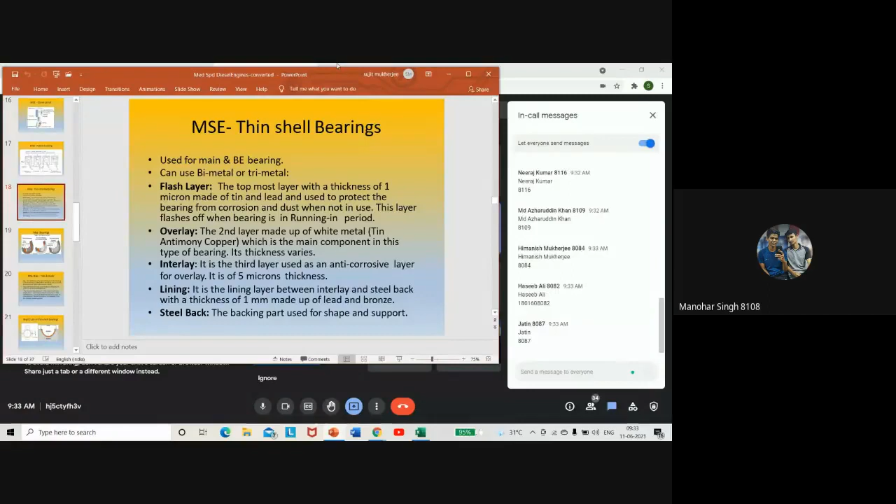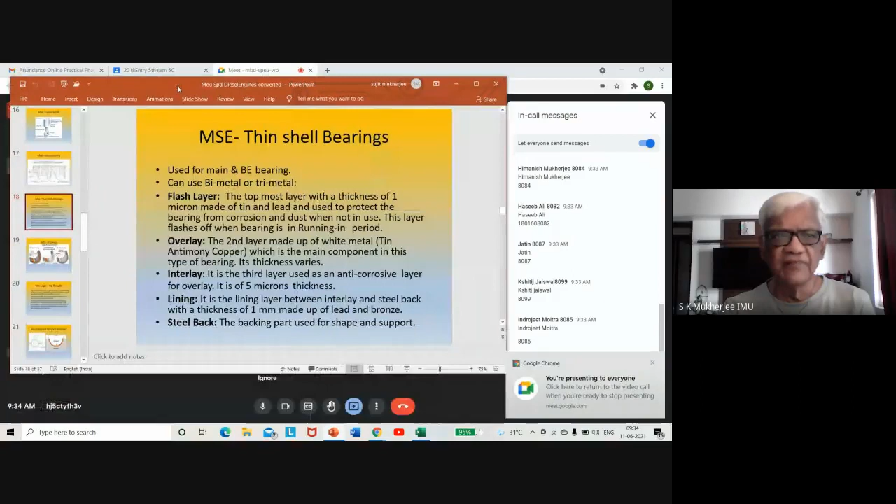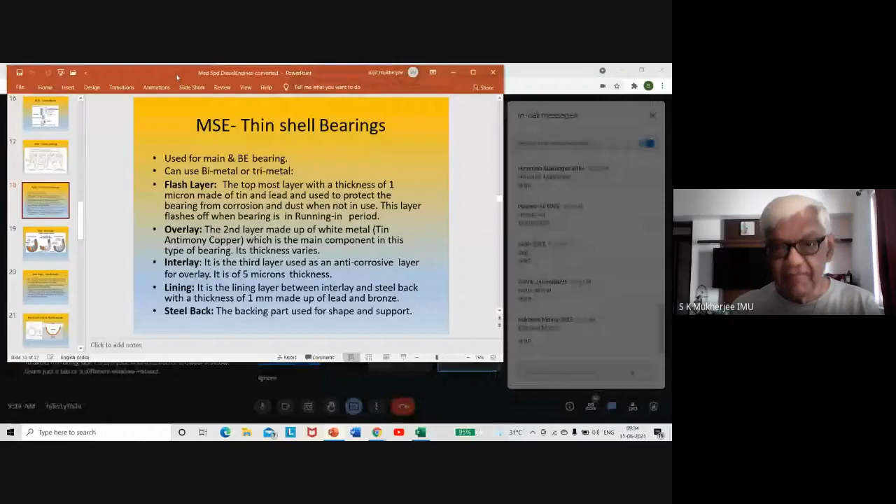All right, let's start with our thin shell bearings. Now, there is a lot of write-up about thin shell bearings, but the basic concept you must be able to absorb before you read the technical fine points. A thin shell bearing is a bearing which can be replaced very easily. I will not go into the details of the older type of bearings used in earlier ships, where molten metal was cast in and then machined, and then it had to be... what was that term? Bedding. Bedding of the bearings was required to be done. Bedding was one of the most difficult tasks engineers used to suffer on the ship, and it used to take almost a whole day for one bearing.

So now all those troublesome jobs have been eliminated and we have what are called thin shell bearings. Now, a thin shell bearing is like a part. If it wears down, you simply change it. If it gets damaged, you simply change it. It's not so costly as the original cast-in bearings. The cast-in bearings were a headache, and if they were damaged, the ship would have been immobilized. It was like that. But now with thin shell bearings, it consists of a strip of plate in the form of a curvature.

And that plate is made of steel. It is made of a little high-grade steel where there is some amount of springiness. All right. And on the inside layer, you have a white metal. White metal is made of either tin, copper, lead, antimony, and a few more elements. But the basic four are tin, copper, lead, antimony. Remember? So with that, you may have a little other rare metals also, but mostly these four metals are there. And here again, they are subdivided into tin and lead-based white metals. Some of the white metals are tin-based, some of them are lead-based.

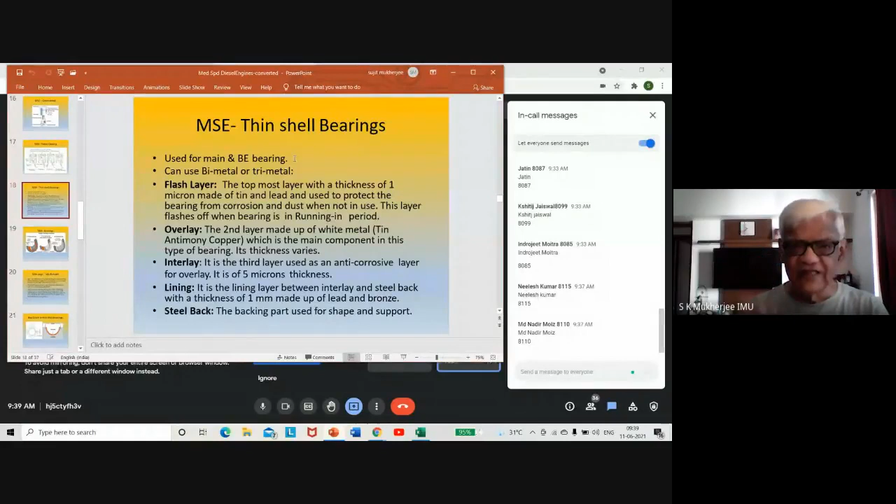So let's read up on what white metals are about. It has a little more detail than you really need, so we'll read it and then see the diagrams. It is used mainly for main engine, main bearing and bottom end bearing in 4-stroke engines. In 2-stroke engines, you will use it for crosshead bearing, bottom end bearing, and main bearing. All three use thin shell bearings. But in a 4-stroke engine, only the bottom end bearing and main bearing use thin shell bearing. The gudgeon pin bearing is a bronze bush, given a little softness by introducing some lead into the bronze. Bronze is basically made of tin and copper, which together form a very hard combination. To give it softness and a smoother surface, a little lead is added into that bronze mixture, so it's called a lead bronze bush.

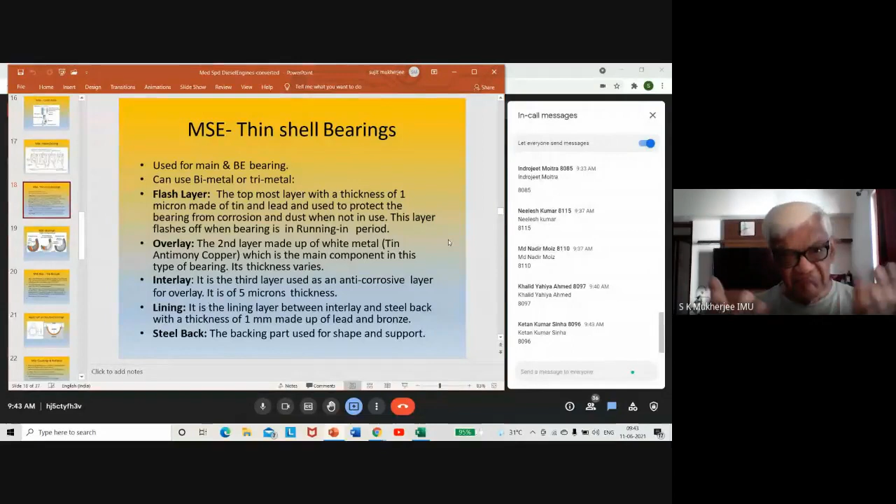I don't understand why he says dust, because when you are going to use it, you will wipe off the dust, put oil on the surface, and then fit it in place. So dust really doesn't make much difference, unless he means the dust gets embedded in the white metal. That is possible because white metal is reasonably soft.

To prevent the dust from being embedded into the white metal, you have a coating of tin and lead. Within maybe 2 or 3 revolutions of the shaft on that bearing, that flash layer is gone.

Under the flash layer, you have an overlay. This is the second layer, made up of white metal. The white metal is the main surface which takes the support of the bearing, and it is tin, antimony, and copper, or lead, antimony, and copper. That is the combination of white metal. It is also called Babbitt metal.

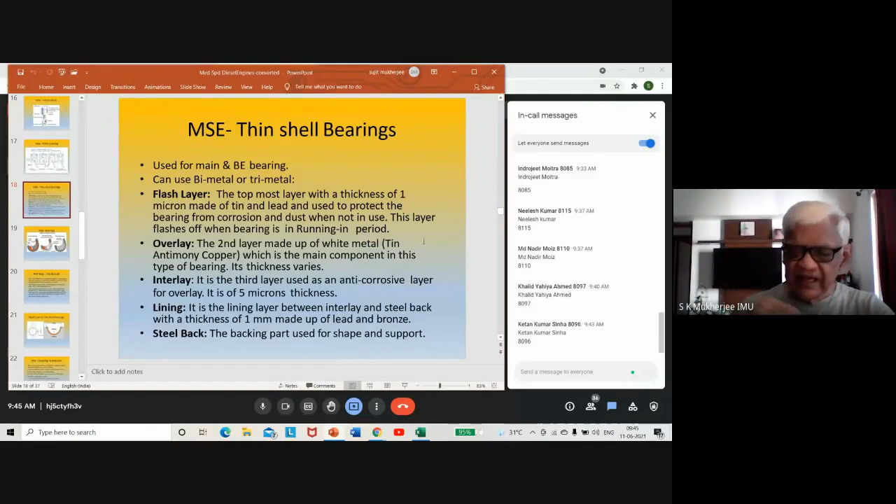You can write it down on a piece of paper: Babbitt metal. It is possibly named after the engineer Babbitt, who designed the first white metal for use in bearings. It has been found to be very good, and is the main component in this type of bearing. Its thickness varies, and this variation is determined by the designer.

He will check how much load it is supposed to give, what will be the temperature of the oil, what will be the viscosity of the oil, and what will be the speed of the shaft. All these parameters are taken into consideration when determining the hardness of the white metal to be used for that bearing. So there is a lot of calculation, mathematics involved in designing a bearing.

It is not only manufacturing white metal and steel and putting them together. There are thousands of permutation combinations of white metal constituents, and the designer can order a special grade of white metal for the bearings he intends to use for the engines.

So that is called the overlay. The interlay is the third layer, used as an anti-corrosive layer for the overlay. It is 5 microns thick. This one also doesn't give so much effectiveness, because 5 microns is almost like a layer of paint.

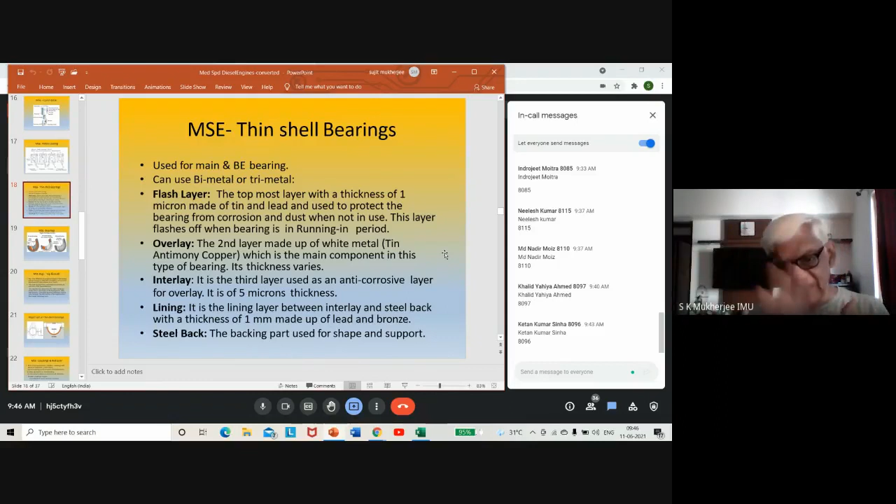It is used as an anti-corrosive layer for the overlay. So first you have the white metal, and underneath that surface you have the interlay. Then you have what is called the lining.

This is the one that holds and gives the bond — it is the bonding device. It is the lining layer between the interlay and steel back, with a thickness of 1 millimeter, made up of lead and bronze, or sometimes copper.

Mostly what I have seen is copper — lead bronze, yes, but mainly copper. Because I have seen white metal getting wiped out and then a layer of copper appears, not totally copper color but a little lighter, which could mean it is lead bronze, because ultimately bronze is also copper. Bronze is copper and tin.

So bronze is copper, tin, and lead. This is the same material that is used in the bush for the gudgeon pin.

Underneath this lining, you have the steel back. This is not mild steel, it is an alloy steel. It is definitely a lot tougher than mild steel.

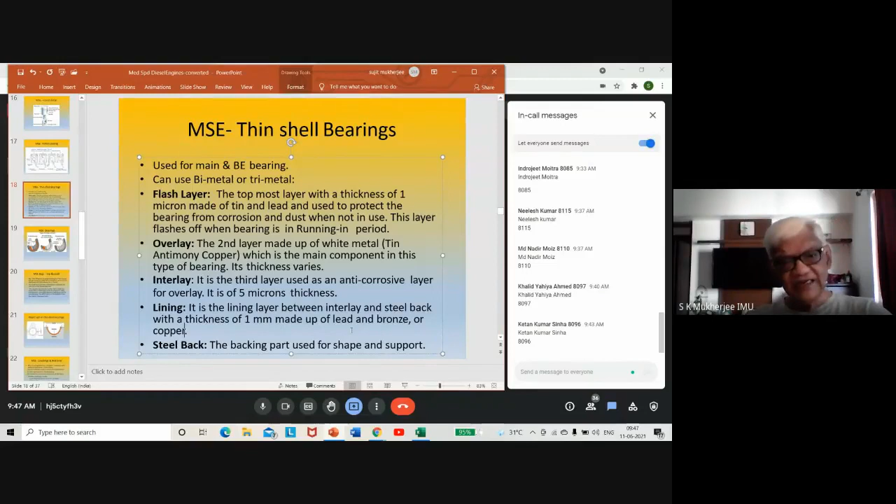Now this is the diagram to show you, it's an expanded diagram. It is not in these proportions what you see, it is definitely much thinner.

But these diagrams are made to give you some idea of what is a thin shell bearing. On the extreme right side, what you see is a steel back, and underneath that you have an aluminium bonding layer. So instead of copper, here they are using aluminium. On top of this, they are using an aluminium bearing alloy, a mixture of some other elements not specified, but the main constituent is aluminium. Aluminium is also a soft metal, and it could possibly be used, but on board the ship we have not used such bearings with aluminium as the surface.

We have mainly used white metal, but keep your mind open that white metal is not the be all and end all as the material used for a bearing surface. So here he can use an aluminium bearing alloy. In some cases you have lead bronze also. But on board ships, most of the bearings, I would say 90%, are white metal bearings, white metal lined bearings. So this is your thin shell bearing where it has an overlay.

Under the overlay, you have the nickel barrier, which is supposed to be anti-corrosive, prevents corrosion. Underneath that you have the copper alloy. This nickel layer is 5 microns, it is as good as nothing. And then you have the copper alloy which is binding the white metal to the steel back. So that is how the thin shell bearing is utilized.

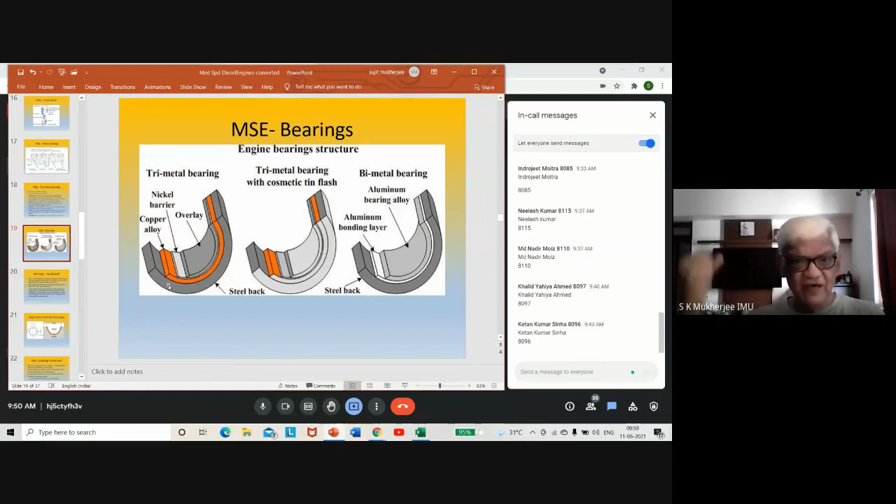Next, nip. Nip and crush mean the same thing. It is actually the extended part of the bearing shell which helps in compressing it and ensuring that the bearing shell sits very tightly on the keep of the connecting rod and the bottom keep. So when they are fitted together, initially the diameter of the shells together, outside diameter, is a little more than the inside diameter of the connecting rod and the keep when they are assembled together.

How much more? Maybe a few hundredths of a millimeter. So when you fit the bearings in place, that is a little protrusion of the bearing shells. But when the keeps are put together and the bottom end bearing bolts are tightened hard, this extended part of the shell is crushed or compressed within the elastic limits without causing any deformation. This helps in creating a force on the curved surface of the shell to improve the frictional resistance of motion between the shell and the entire crosshead bottom end bearing housing.

So when it is working, the shell will not rotate inside. The whole idea is to prevent any rotation or looseness of the bearing shells when it is working. If you do not understand, please put it up on the chat column, I will immediately address your doubts.

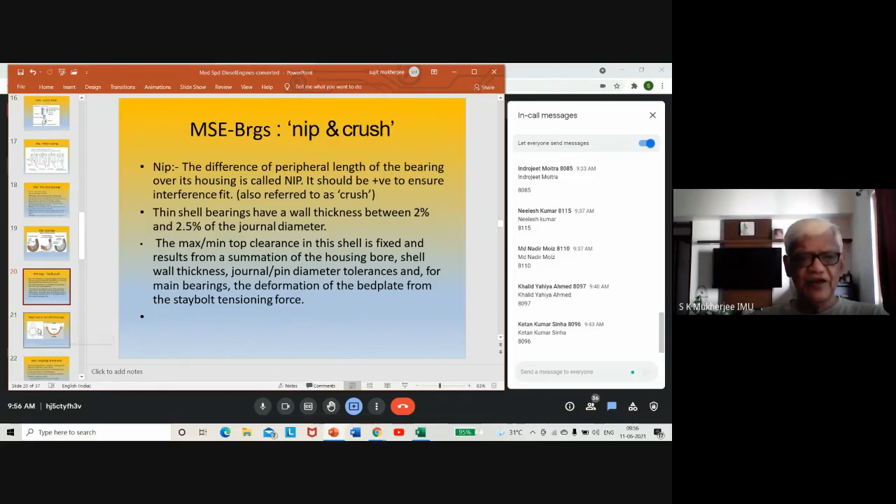Now here is your diagram which shows you how a thin shell bearing is installed. The lower half is installed in this position and it protrudes a little bit more than the hemisphere of the housing. The hemisphere of the housing is this lower piece, and the upper piece is part of the connecting rod. So when the two of them are put together with the bearing in place, there will be a gap between the faces of the bottom keep and the connecting rod.

This gap is called the crush height, and it is the height which is brought down from whatever it is to zero, because that is the time when the two bottom end bearing bolts are tightened to the required torque. So in tightening the bolts, this gap will vanish. It will disappear - in other words, the material which is protruding here.

This will be compressed. This compression force ultimately results in a force along the curvature of the bearing shell at the bottom, as well as the curvature on the bearing shell at the top. The top half is not shown here, but it exists as you've seen in this diagram. So when these bolts are tightened, the maximum force is exerted in the radial direction to increase the pressure of the shell against the keep. This prevents the shell from rotating inside when the engine is working.

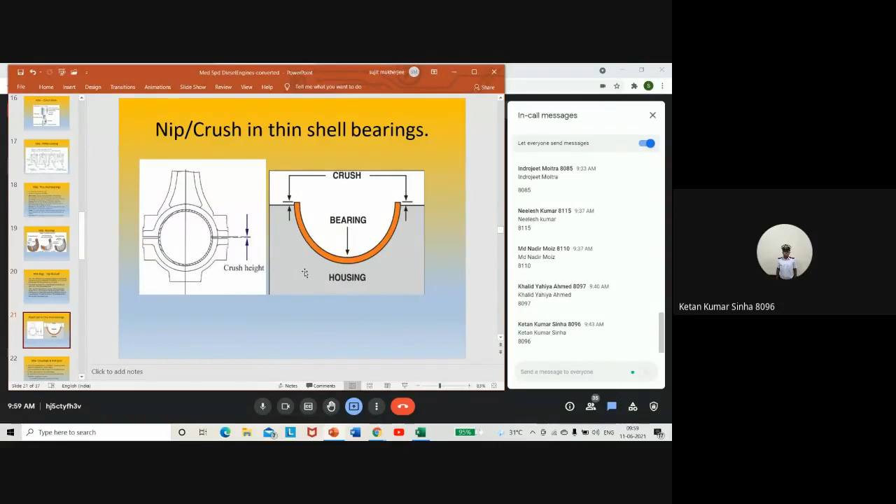For lubrication of the bottom end bearing - the gudgeon pin. The oil hole in the shell must match the oil hole in the connecting rod, and only then can the oil go to the gudgeon pin. If the two shells rotate, the oil hole of the shell will change its position and the oil hole to the gudgeon pin gets blocked. So your gudgeon pin, piston, everything will fail. It is very important to ensure that when the shells are fitted, they are fitted in the correct position and tightened to the required torque, so that the oil hole in the shell matches the oil hole in the connecting rod.

Ketan, now you kept me awake also. Otherwise it's not easy to constantly talk and stay awake because I can't see you. I can only see my laptop screen, which is very difficult. So I'm waiting to get back to our original procedure of classes.

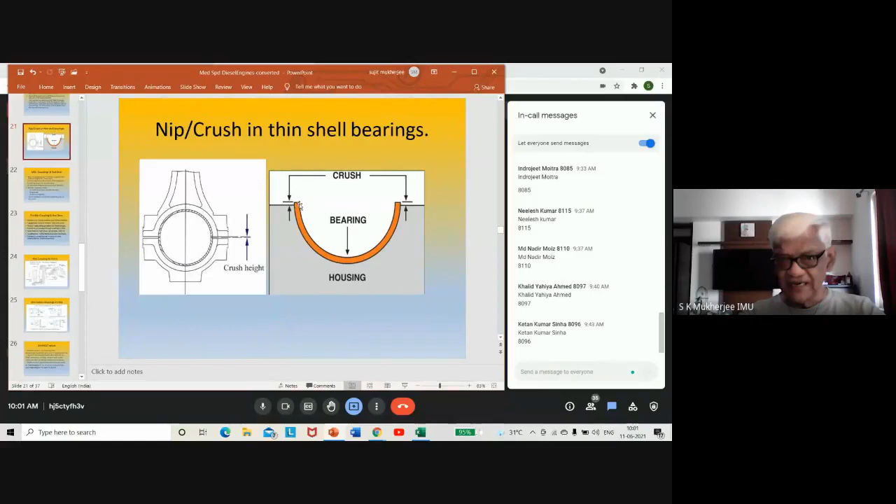Okay, so I hope everybody has understood the arrangement of a thin shell bearing, and what is crush and what is nip - it should be very clear to you. Next, for medium speed engines, now that thin shell bearings are finished, let us go to couplings and reduction gears.

Medium speed engines, because their speeds are much higher than the propeller, will need a reduction gearing. This reduction gearing is also coupled with a flexible coupling. This flexible coupling helps to accommodate small amounts of misalignment, it takes up some amount of shock loading, and it eliminates or reduces transmission of vibration.

Most of you will have seen a flexible coupling. In fact, in the engine room, every item has got a flexible coupling - whether it is a small pump, a piston cooling pump, or a compressor, everything has got one. This flexible coupling is very simple in most cases. It just has a rubber pad between the driving shaft and the driven shaft. So what is being turned is actually pushing onto the rubber pieces, and those rubber pieces are ultimately pushing onto the driven shaft.

So if there is a sudden torque, that torque will impact on the rubber, which is compressible. So it takes up any shock loading or sudden compressive forces, and does not transmit that force to the driven member. Similarly, if there is any misalignment within small limits, the bearings supporting the shaft will not be under undue loading, so the bearings will still remain fine. If the shafts are rigidly coupled and there is misalignment between one shaft and another, the bearings will be getting damaged very quickly, because the shafts will be bent, and as they rotate they keep bending in opposite directions, and the bearings get worn out or damaged.

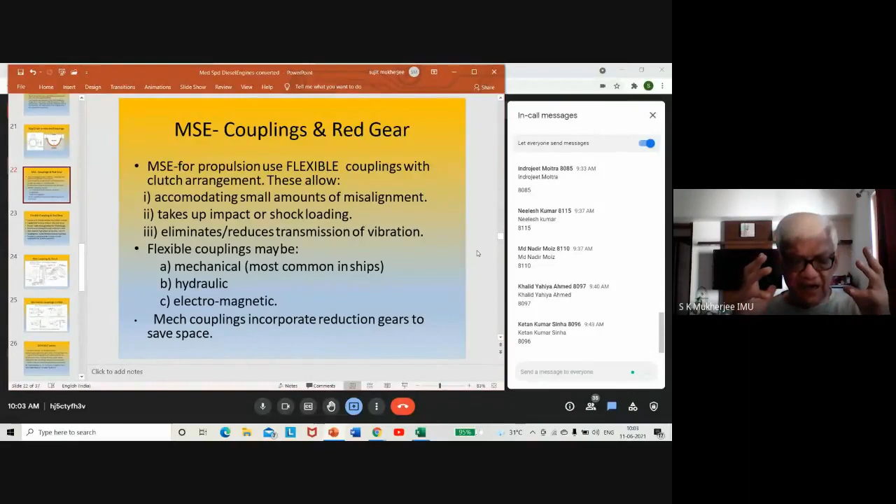But with a flexible coupling, it can take some amount of misalignment, some amount of shock loading, and if the driving shaft is vibrating, that vibration will not be transmitted to the driven shaft. So this is what a flexible coupling means, and this is used on almost every drive in the engine room.

You will see the flange of the motor and the flange of the pump, and in between they have a rubber pad. You have probably seen it at home if you have a pump in the basement with an electric motor and a pump. The coupling flange there is hollow, and inside that hollow space is a rubber disc. That rubber disc has got 4 holes - 2 holes are for the motor pins and 2 holes are for the pump pins. The disc in turn transmits the forces from the electric motor to the rubber pad, and the rubber pad transmits the forces to the pins of the pump.

So that itself has some amount of shock absorption. Apart from shock absorption, if the 2 pins are slightly misaligned, it doesn't make any difference - the rubber will take the shape and accordingly transmit the torque. Similarly, if there is any vibration of one shaft, the vibration to the other shaft will not be fully transmitted - actually it will be transmitted, but it will be damped out considerably. Total removal of vibration will not be there, but definitely it will be reduced to a large extent.

In mechanical couplings, some transmission of vibration is there, but in hydraulic and electromagnetic couplings, it is damped out completely. So now you know what a flexible coupling is - it accommodates vibration, takes up shock loading, and can take up some amount of misalignment. Flexible couplings may be mechanical, hydraulic, or electromagnetic. The most common are mechanical devices, which we will discuss now. Mechanical couplings incorporate reduction gears to save space.

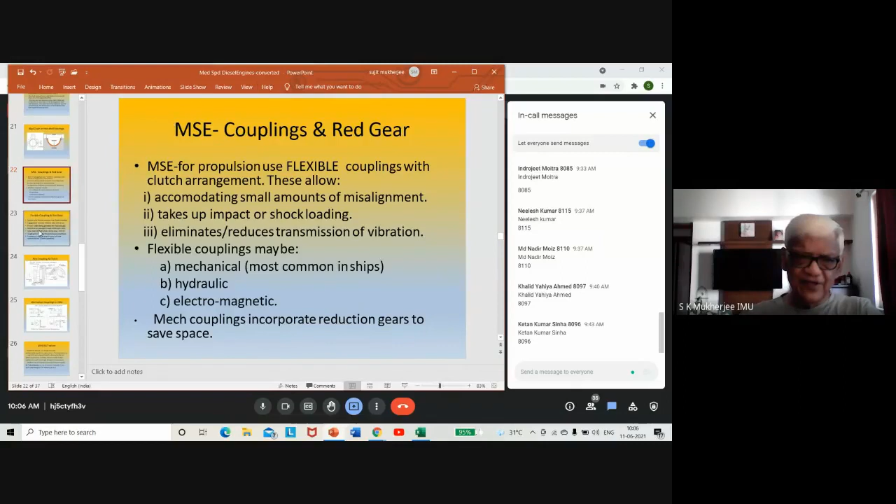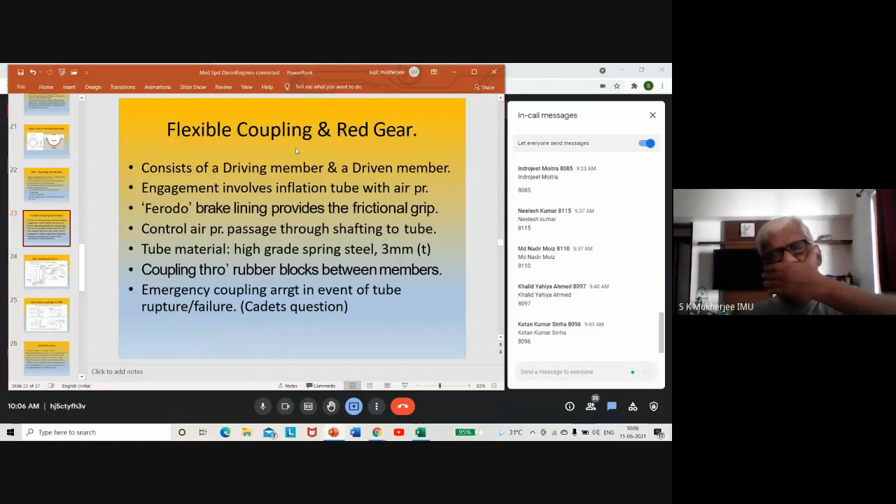Flexible coupling and reduction gear. This consists of a driving member and a driven member. The driving member is generally the crankshaft of the engine, and the driven member is the propeller shaft that leads to the propeller.

Engagement involves how the driving member engages the driven member. It involves the inflation tube with air pressure. The moment there is air pressure, it inflates the tube, and the tube makes contact with the driven member through a Ferodo brake lining. The Ferodo brake lining is what gives the grip. If you cannot have metal to metal, it will slip. So you must need a frictional material, and the best frictional material is Ferodo brake lining.

You might have ridden on bikes, or seen car brakes dismantled. Inside there, the surface which rubs against the drum to create the braking effect is called Ferodo brake lining. Ferodo is possibly a trade name, but it is generally made of asbestos and other compounds.

Let me make a note. I have to find out exactly what the material is for Ferodo lining. I know it is asbestos and other material, but what exactly are the materials used in the lining?

So this brake lining is against the inflation tube. The moment it inflates, it engages. It is something like your car brake or a motorcycle brake. You're more familiar with the motorcycle brake. So when you pull the brake, the brake lining comes and makes contact with the drum, and then there is friction, which reduces the revolution of the wheel. So that's the same idea.

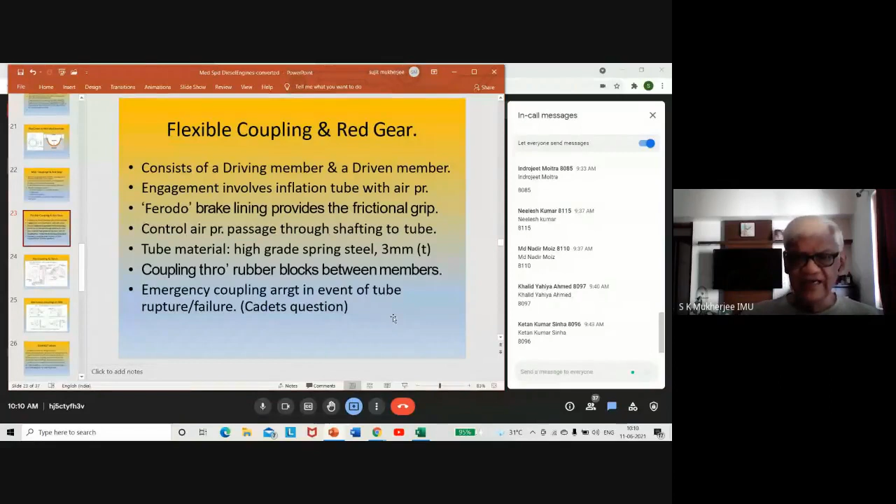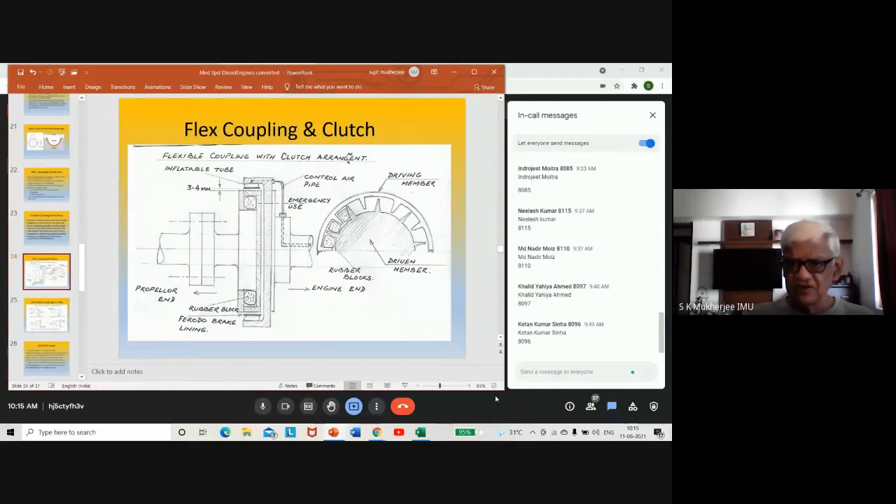Khalid Yahya Ahmed. No response. Okay, Nilesh Kumar. No response. Yes, sir, who's this? Nilesh Kumar. Yes, sir. Okay.

Nilesh Kumar, have you understood what I've said about the clutch and the flexible coupling? Yes, sir. Okay, but sir, can you explain the clutch once again, sir? You are not paying attention. No sir, due to network problem.

Okay, the clutch consists of a drum, a hollow drum like that you see, and it is fixed rigidly to a flange. And that flange is part of the shaft which is coming out from the engine. After this, you will have a flywheel, and then you will have the engine.

The moment air is passed through this passage here, it goes and inflates the tube. The tube is on the inside of the drum and it is about 12 to 15 inches wide and about 2 to 3 inches in height. The Ferodo lining will be about 10 millimeters, a maximum of 10 millimeters. So the clearance between the lining and the drum is barely 3 to 4 millimeters, which speaks of a very, very high level of alignment between the driving shaft and driven shaft.

If the driving shaft and driven shaft are not aligned, that means there will be no clearance all around. At some portions, it will be touching. That should not happen. So when the tube is inflated, the Ferodo lining makes contact on the drum. This is the driving member and it grips that entire drum and rotates it.

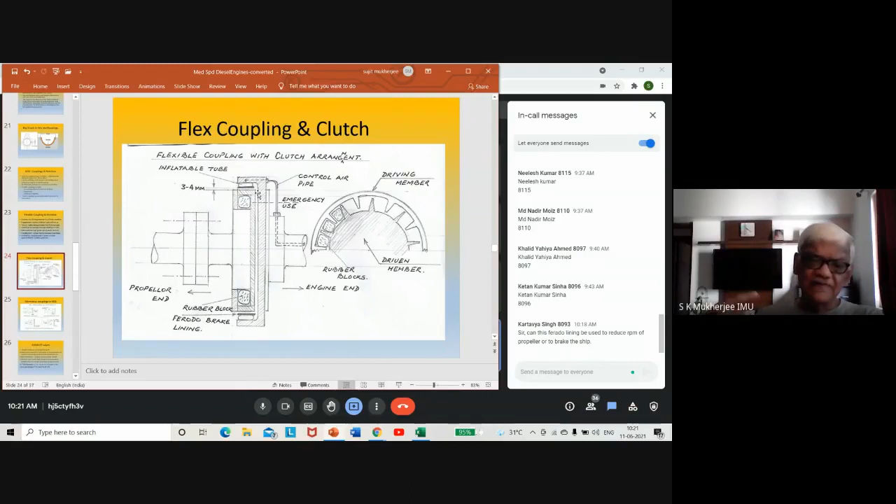After some time, the friction between the pad and the propeller shaft drum will help to stop the propeller from rotating. Then, once the propeller stops rotating, because the grip is on the Ferodo lining, it will require the propeller to rotate in the opposite direction. And as it starts rotating in the opposite direction, the speed of the engine increases. That means the propeller is rotated very fast in the astern direction to further cause a braking effect on the ship. That is what you said.

Both the engines are reversible and they both have clutches, and they are running one propeller. So out at sea, you can run both engines at full power to give the maximum thrust by the propeller onto the thrust shaft. So that possibility is there.

In a harbor or near the port, when the ship is going to be docking, you need very frequent changes of direction for the propeller - ahead, astern, ahead, astern. And it is not advisable to keep stopping and starting the engine for this. So what they do is put one engine running in the astern direction and one running ahead, and all they do is disengage one clutch, engage one clutch, disengage one clutch, and engage one clutch. So in that process, you can keep changing the direction of rotation of the propeller.

So this helps avoid having the air compressors continuously filling up the air bottle and causing much more wear and tear of the engine by stopping and starting each time the bridge or the captain wants the ship's propeller to rotate in opposite directions.

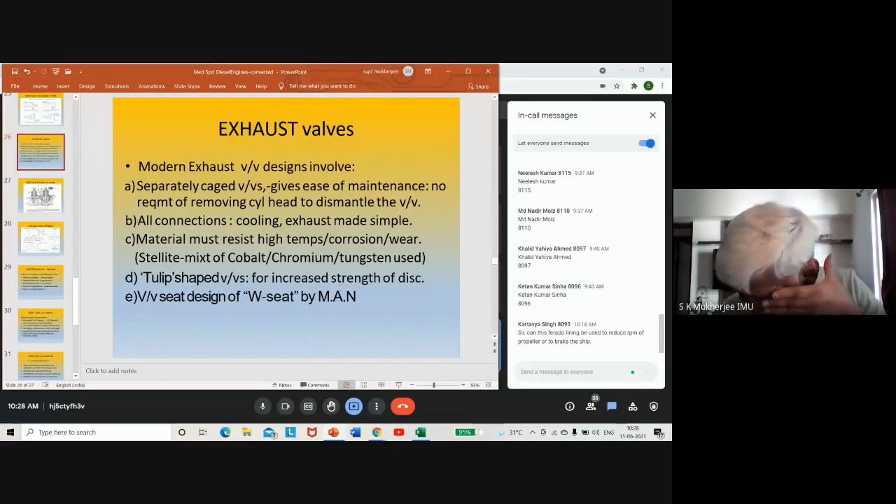So the exhaust valve is made in a way where there is a cage. The cage is intended to allow the hot gases to pass through. So this entire valve with the cage is installed in the cylinder head. And if required for overhaul, you can conveniently remove the exhaust valve without disturbing the cylinder cover. That is the modern concept of exhaust valves in cylinder heads, where the entire valve can be taken out without having to remove your cylinder head.

Okay, just give me a minute, please. I will go and get my water bottle. My water bottle is not here.

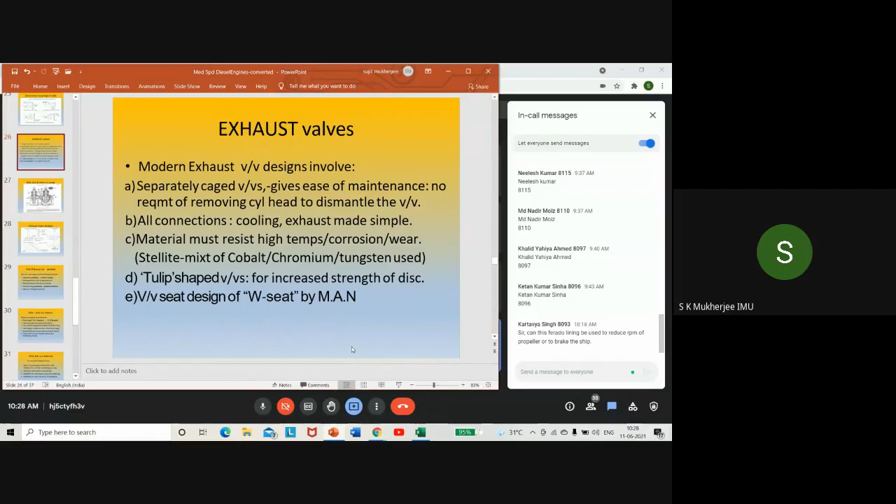Okay, I am back with the water bottle. Let me drink a little water and I will restart again. You can read it in the meantime while I sip a little water. My throat is hurting.

So in these exhaust valves, which are separately caged and can be removed from the cylinder head, all the connections, cooling water and exhaust, the exhaust passage is made very simple. The cooling water passage has simply a pipe with two rubber rings which can be fitted in the sockets without any flanges, without nuts and bolts.

Similarly, the exhaust passage has what is called expansion bellows. Write it down - expansion bellows - and find out what these are. They are made because the temperature variation from room temperature to 350 degrees centigrade causes expansion and contraction of the pipe. So instead of using a pipe, they use an expansion bellow. The bellow is soft, it is compressible, and at the same time it can take very high temperatures. So the exhaust gases pass through the expansion bellows.

Material of the valve must resist high temperatures and corrosive wear - corrosion and wear are actually synonymous. So what material do you use? Stellite. Stellite is a material which is a mixture of cobalt, chromium and tungsten - CCT. This stellite is generally used for the seat of the valve. The valve itself is made of something else which is also very hard, with very little ferrous material. But the seat of the valve, which is subject to maximum wear, is made of stellite - that's the most common material used. This stellite has a mixture of cobalt, chromium, tungsten, and some other items too. I will show you a chart just now which will give you an indication of what they're made of.

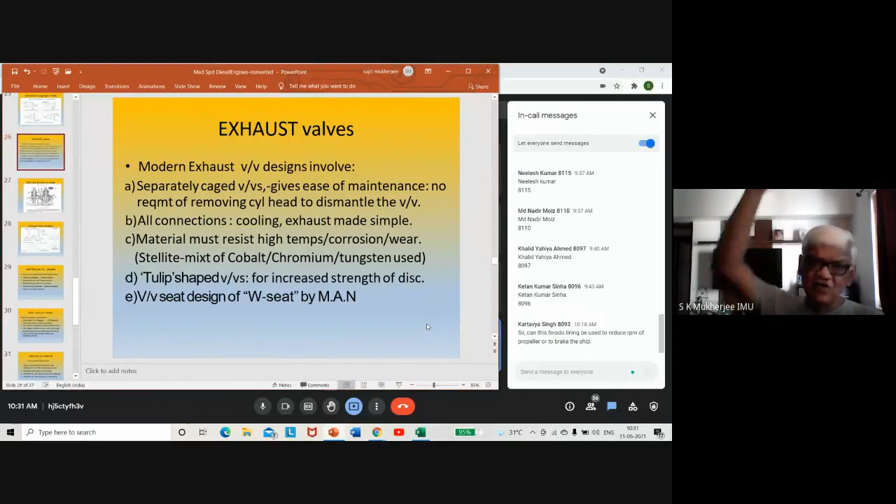Other than that, the design of the valve is sometimes tulip shaped. Tulip is the name of a flower, and that bulb of a flower is similar to the shape of the exhaust valve. It is made that way to improve the strength of the disc of the valve. The valve has a disc and a spindle, so the disc portion may bend. To avoid this, it is made thicker. But there is a limit to how thick it can be made, because if it is made thicker, the thermal stresses that arise will become more, and possibly there will be cracking of the valve. So there is a limit to how thick the disc can be - it has to be strong enough to bear all the stresses, and there are a lot of stresses we will come to just now.

Then you have a different design by the MAN manufacturer, called a W seat. When the valve is ground on the seat of a cylinder cover insert, it seats very well. But when running under a temperature of 350 degrees centigrade, some distortion takes place. This happens because the underside of the valve is very hot, as it takes part in the combustion space, while above the disc it is not so hot. So the bottom part of the valve expands more, and once it expands, the seat angle changes, creating a possibility of exhaust gas leak. So MAN has come out with a design where, when it expands, it will make contact and perform the seating, and when it is cold, again it will perform the seating - avoiding any form of leakage when working.

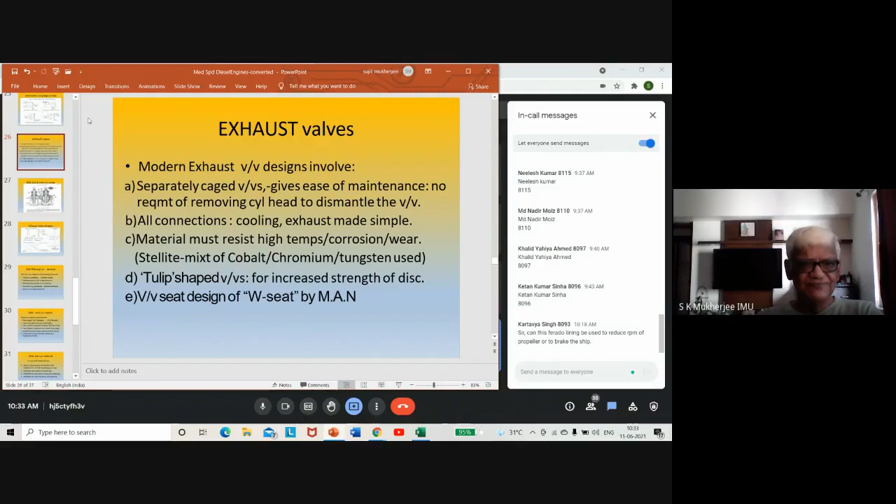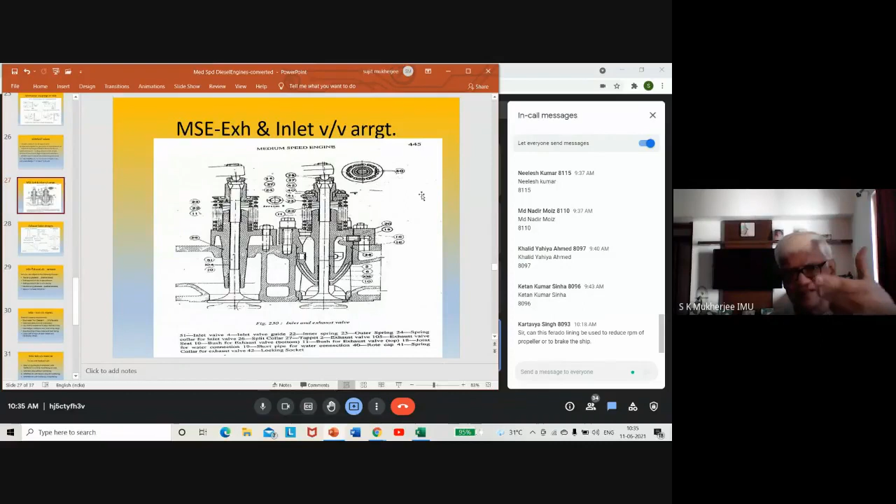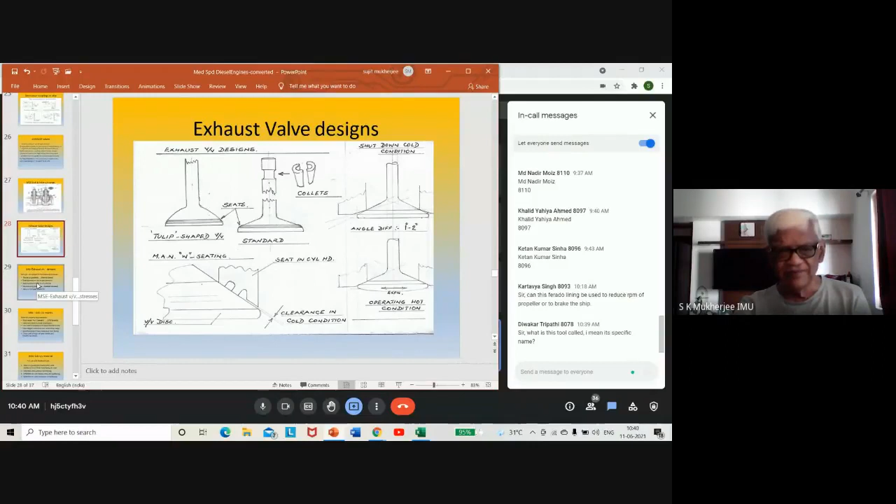Otherwise, the entire course on medium speed engines will go into only valves. So I have skipped a lot of information to ensure you're aware of whatever little is required. If you want more knowledge on this subject, you will have to read beyond my program, my notes, or my PowerPoint programs. I cannot include everything, otherwise each program would become 100 plates.

Now, exhaust valves are subject to the following stresses. One is the temperature gradient or thermal stress. Next one is seating pressure due to gas pressure.

That means when combustion takes place, there is gas pressure on the valve, so that valve disc will be under a lot of pressure. Apart from these gas pressures, the springs are pulling up the valve. That force itself is considerable and it exerts pressure on the seat of the valve. This is called seating pressure due to closing of the valve.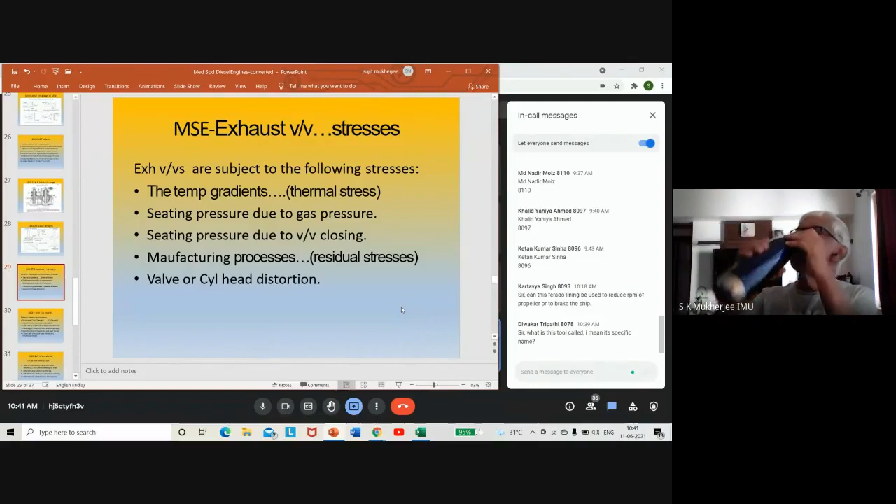The closing of the valve is done by the springs. Next is manufacturing processes, which give rise to residual stresses, which is very rare. Unless you give the valve for reconditioning, the residual stresses will not be there. How do residual stresses arise? If some part of the valve is overheated and another part is not heated, you will have residual stresses.

Like welding, to deposit metal on the seat with stellite, you need stellite iron rods or welding rods. These welding rods are very costly, and they are used to deposit metal on the seat. Thereafter, they are used on the lathe machine to smoothen them out. Once smoothened, they can be used.

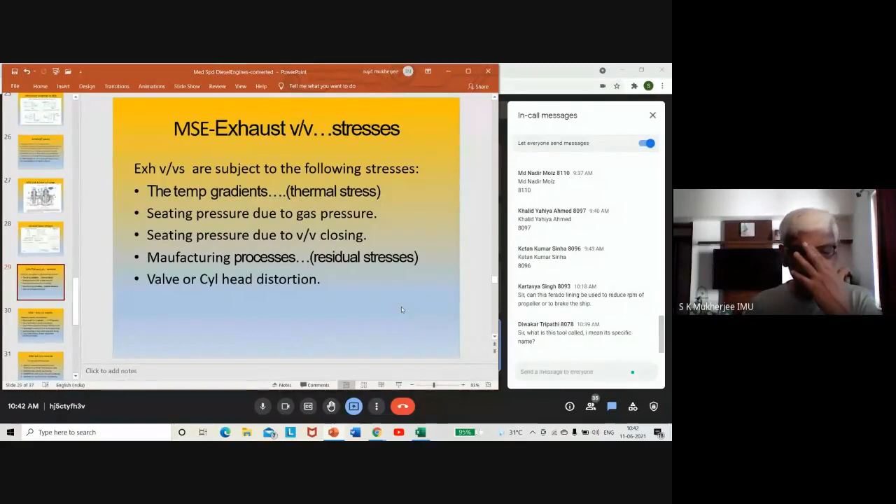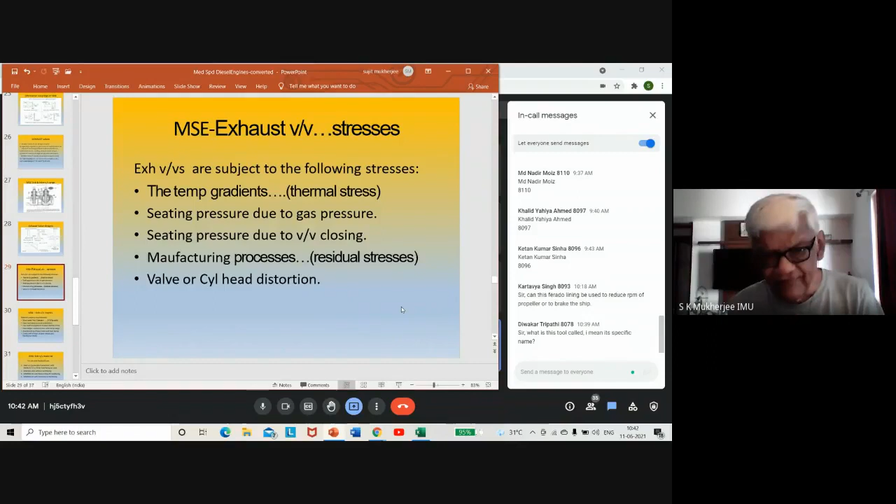But when you weld, you are always generating some amount of residual stresses in that component. What you require to do is actually heat the entire valve with the seating to a very high temperature, then allow it to cool gradually. This process is called annealing.

But normally, if you give it for reconditioning, these fine processes are not done. These fine processes are only done by the manufacturing companies with the right temperatures, the right conditions, etc. The local manufacturer may give it some annealing, but that does not compare with what the original manufacturers do.

Apart from this, the valves are also subject to some stresses. If the cylinder head gets distorted, if the shape of the cylinder head distorts, then the entire alignment of the valve with the seat will not be there.

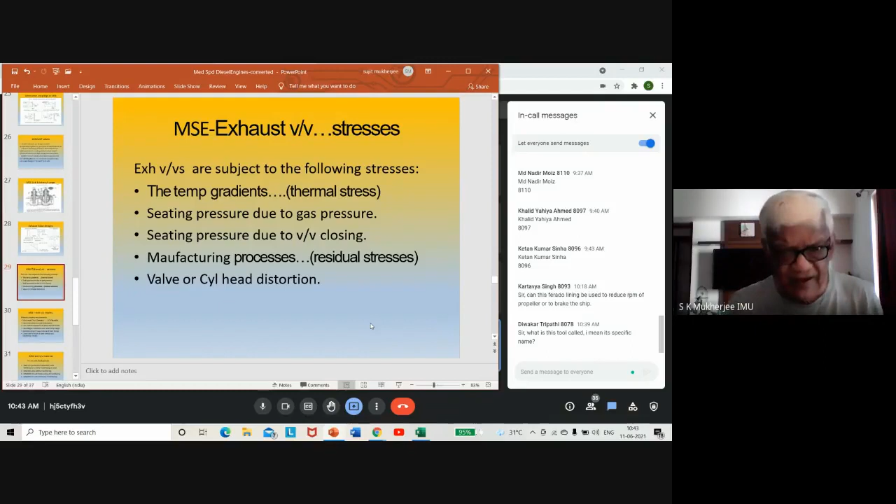What are the material property requirements of exhaust valves? It must resist hot corrosion. Hot corrosion is a mode of corrosion by which sodium and vanadium play a large role.

This sodium and vanadium, when burning, form very complex salts. These salts deposit on the valve seats, on the valve stems, in the exhaust passage, on the turbine blades, everywhere the exhaust passage is there. These deposits are very, very corrosive if they are in the liquid state.

But deposits are generally in solid state. Now, some of these salts, all of them, are called sodium vanadates. There are a total of 8 different sodium vanadate salts, all having a little different molecular construction.

And the most basic one melts in the region of a little more than 450 to 540 degrees centigrade. The others melt at a higher temperature. Now, if the salt deposited on the seat of the valve reaches a temperature where it melts, in the melting condition, it is very, very corrosive.

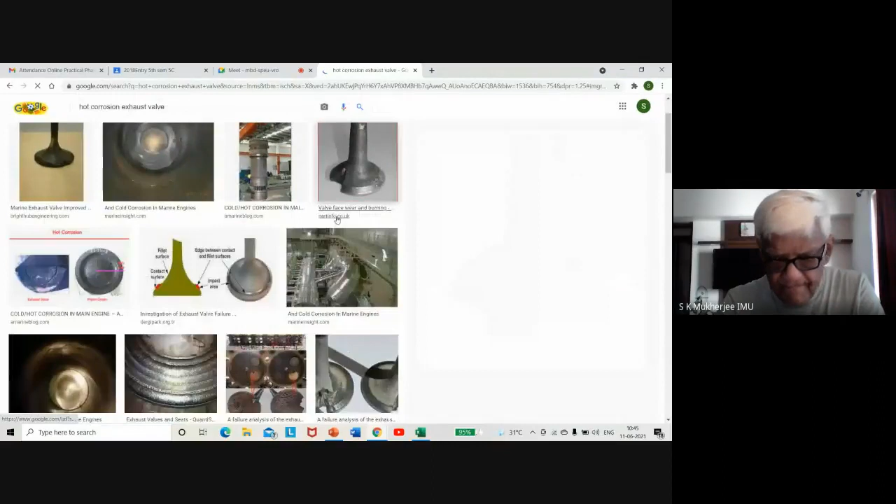Okay, Ketan, can I see the diagram? Yes, sir. Okay, now see, this is an example of hot corrosion. It looks like a rat has eaten it up.

I have actually had the experience of such hot corrosion, and it is largely on account of sodium and vanadium being present in the fuel oil.

So in the fuel oil, how does sodium come into the picture? Vanadium is always there in the fuel oil. It cannot be avoided, but the limits vary. Sodium comes in if the fuel oil is contaminated with seawater, and seawater contamination of fuel oil is not uncommon.

It's very common on the ship. In fact, when you take bunkers, your fuel oil will have some amount of seawater in it, because the barge which has brought the oil has probably been in bad weather and some water has gone into the barge where the oil is. That is how it comes up.

So that seawater, when it is evaporated, the water goes away, but the sodium salts—sodium chloride, magnesium chloride, calcium sulfate—all remain. Sodium chloride is the largest constituent.

So this sodium reacts with the vanadium during combustion to form sodium vanadates. These are very, very corrosive and cause corrosion to the extent you saw just now. That type of corrosion is called hot corrosion.

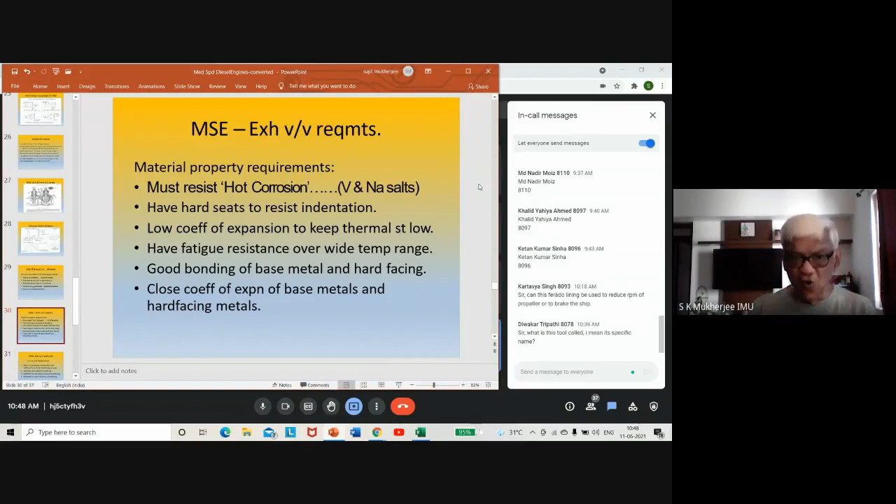It must also have a low coefficient of expansion to keep thermal stresses low. The moment the coefficient of expansion is large, it tries to force itself against the other. That means the stellite has a different coefficient of expansion than the valve. Now, when there is a temperature change, they will be forcing against each other, and it brings about thermal stresses.

Next is having fatigue resistance over a wide temperature range. Fatigue failure takes place largely on account of fluctuating stresses, and sure enough, the valve is under a lot of fluctuating stress and is prone to fatigue failure. But in my experience, before fatigue failure can take place, I find the valve gets damaged, or the seats get burnt, or the seats get corroded. Fatigue failure is a much more remote occurrence for exhaust valves.

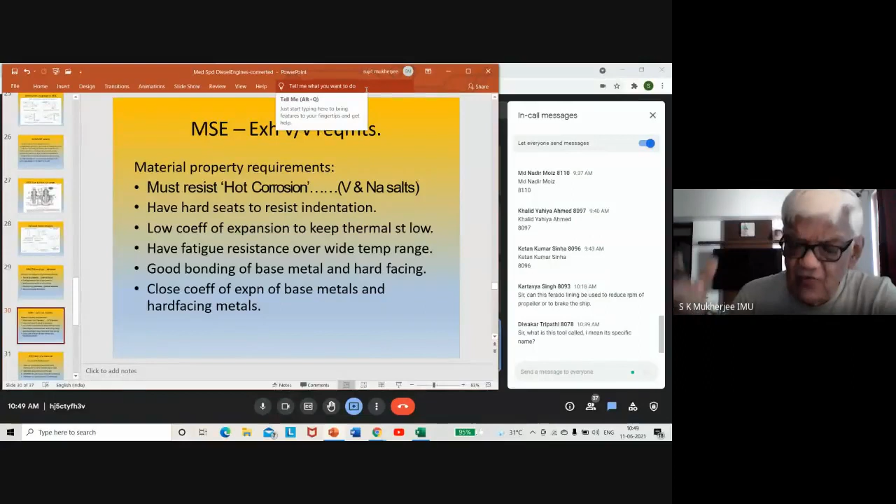Good bonding of base metal and hard facing—that means the hard facing put on the valve seat must have very good holding strength with the main valve material. That means a close coefficient of expansion between base metal and hard facing metal is desirable. Let's put it here. Desirable—incorrect, desirable, okay, never mind. So that is what it is.

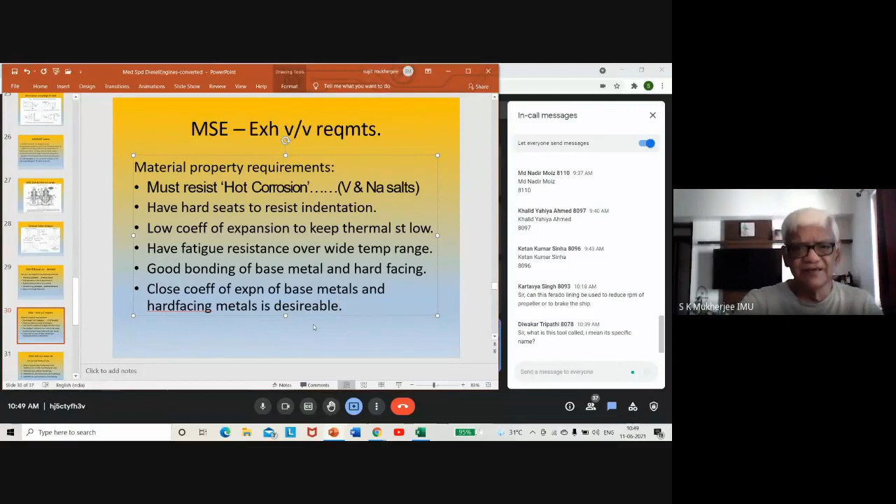Next, what is the material used for exhaust valves used in residual fuels? In your distillate fuels, you can use martensitic, austenitic and martensitic material without the stellite seating. Those valves are capable of taking distillate fuel.

But in the case of residual fuels, you will need hard facing, because one of the items residual fuel brings about is ash and debris. This debris will create a lot of indentation and damage to the valve. So that is why you use special material for hard facing.

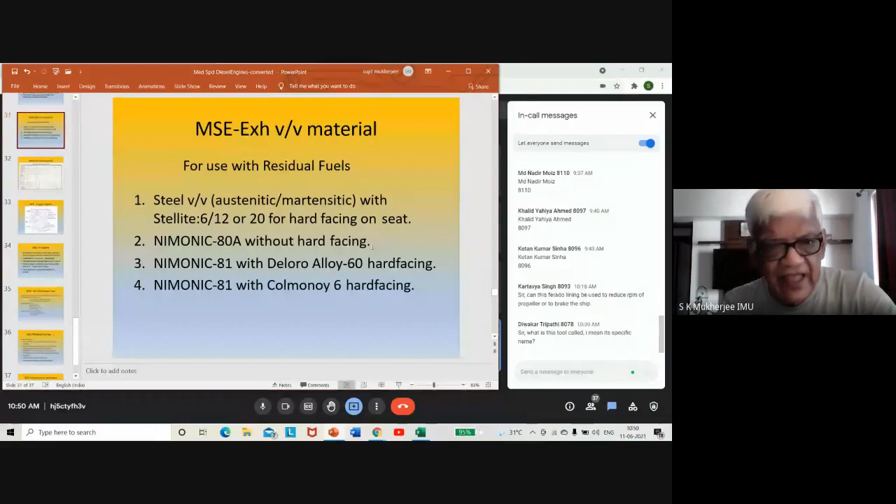So the material used for the valves is Nimonic 80A without hard facing, because Nimonic by itself is very hard. It can be Nimonic 81 also with Deloro alloy 60 hard facing, Nimonic 81 with Colmonoy 6 hard facing, or you can use stellite also—stellite is also used for hard facing. The Colmonoy and Deloro are more recent developments and not so common, but they definitely give very good or improved performance of exhaust valves.

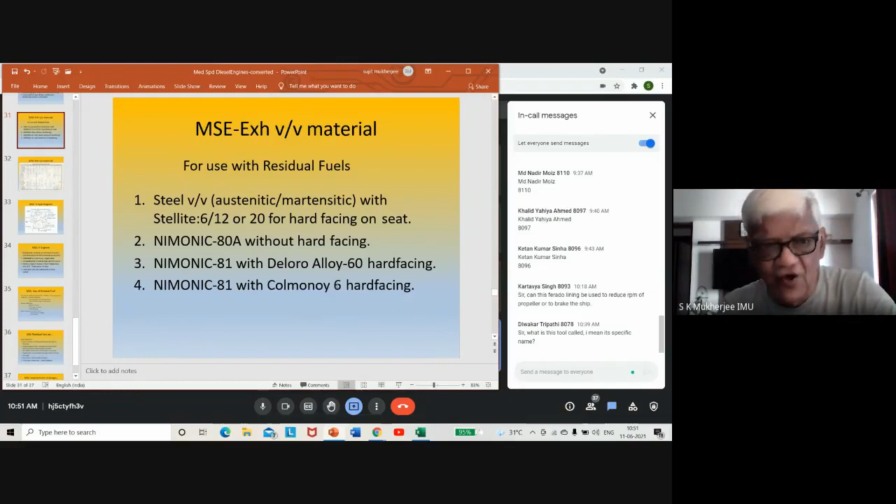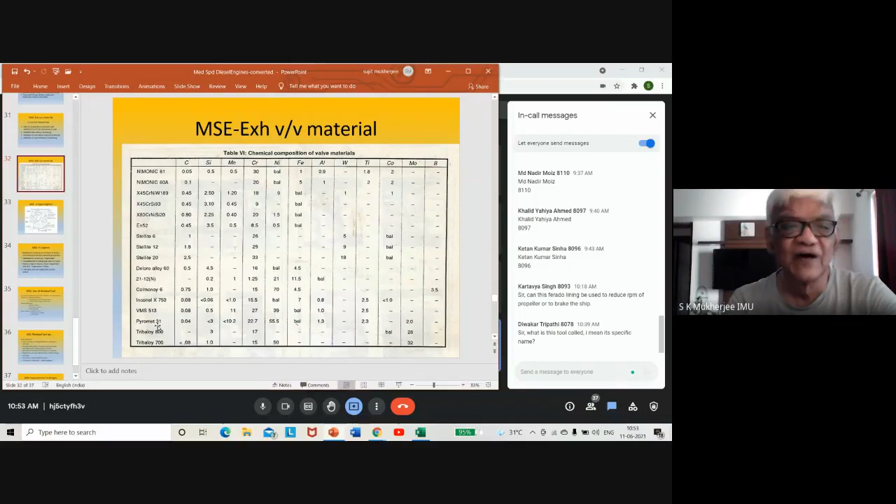So there are other metals also which I have shown, and none of them have a very high level of iron. This one, 2112, has got 11% of iron, meaning 88-89% is remaining other materials - balance aluminium. Very strange, this must be a very simple valve. Very unusual, I never heard of aluminium being used as an exhaust valve. Anyway, these are not of our relevance, our importance is the Nimonic. Okay, let's move on.

Wait a minute, what is this? Divakar, sir, what is this tool called? I mean a specific name. Which tool? Sir, the tool used in the exhaust valve spring.

That tool is just an iron rod which acts as a lever, giving you mechanical advantage. It's like a lever, and the end of the lever has a hinge, and on that hinge you have a circular iron ring. At the end of that ring you have a means of locking it onto the cylinder head, above the crosshead. When you use this tool to press it, that ring helps go round the spindle and compress down on the spring carrier. It presses down on the spring carrier, the spindle comes up, and the collets will fall out. Once the collets fall out, the spring carrier can be slowly released with that tool, so it comes out. That is the only way you can dismantle the springs to remove the valve from the bottom if it is an inlet valve. For an exhaust valve, it has to be put on a stand, and a similar tool is used where the spring carrier is pressed down, allowing the spindle to come up from the middle. Once that happens, the collets are accessible and can be removed, and then the spring carrier can be removed. The collets lock the spring carrier in position while the springs are under compression. Otherwise there is no other way.

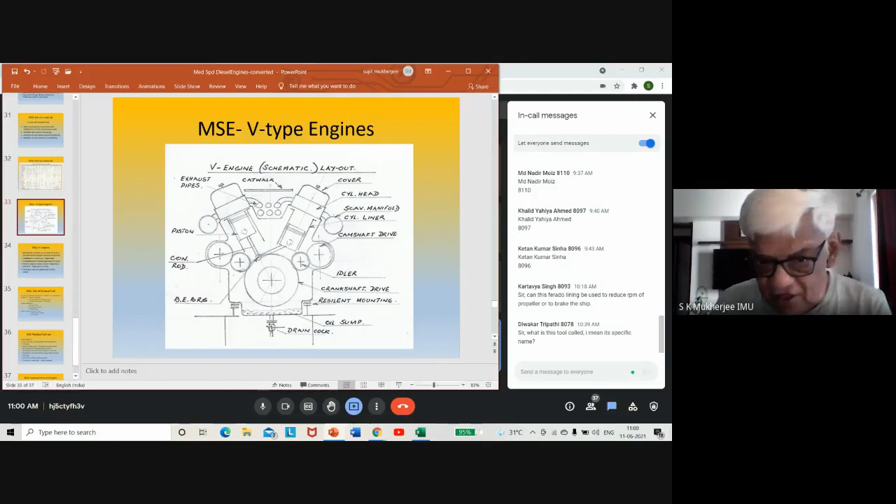At the bottom of the engine you have what is called the sump, where the oil is stored. There is a drain cock which has to be very carefully closed. Of course, when you're going to change the oil, that is the only time you will require to drain and change it.

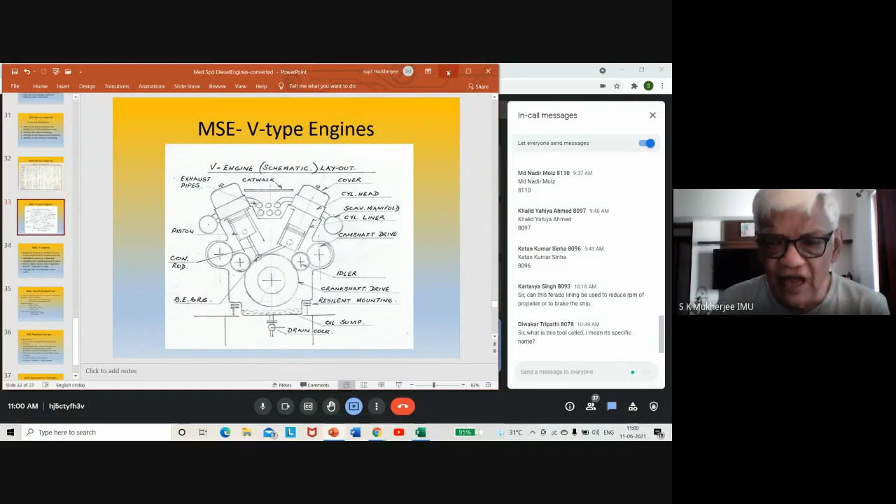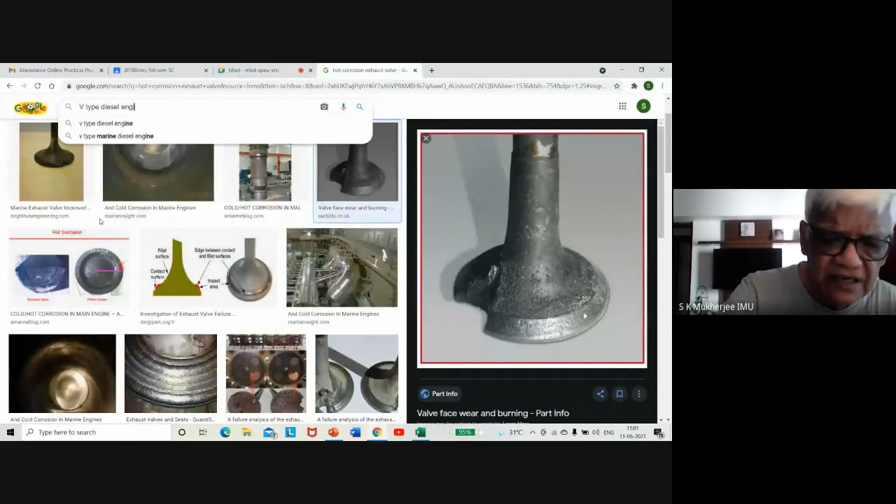So this is your V-type engine. Remember the characteristics, in case you are required to draw this diagram. I've made it as simple as possible. Most have seen what a V-type diesel engine looks like. Let's have a look at it.

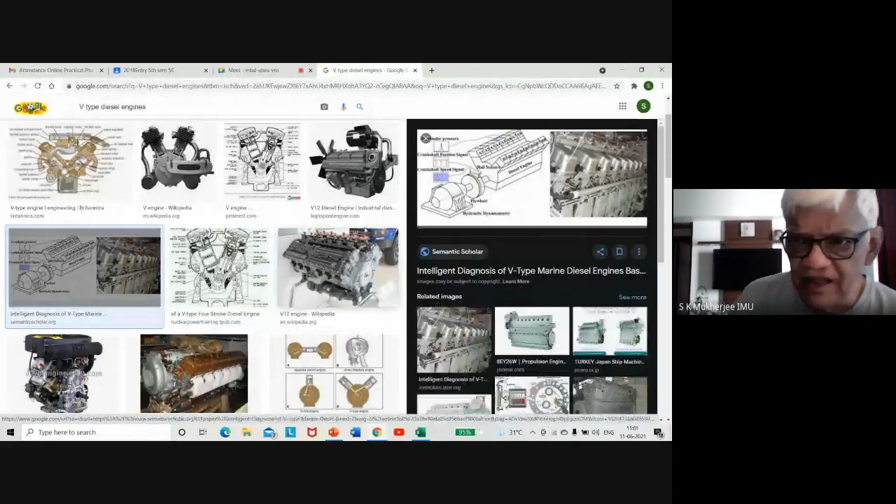Here's the best diagram. I hope you can see this. Here's a V-type engine. This is A bank and this is B bank, and then you have a flywheel, and of course a hydraulic dynamometer. The diesel engine is there. So this is what it looks like.

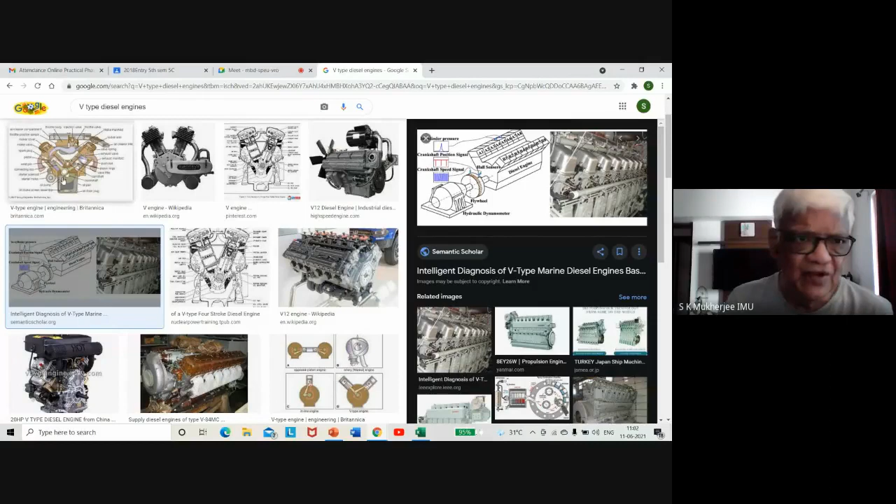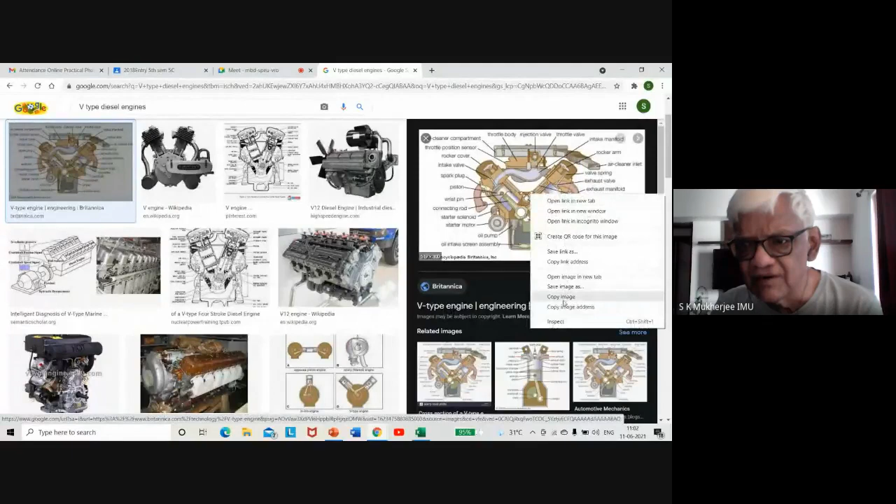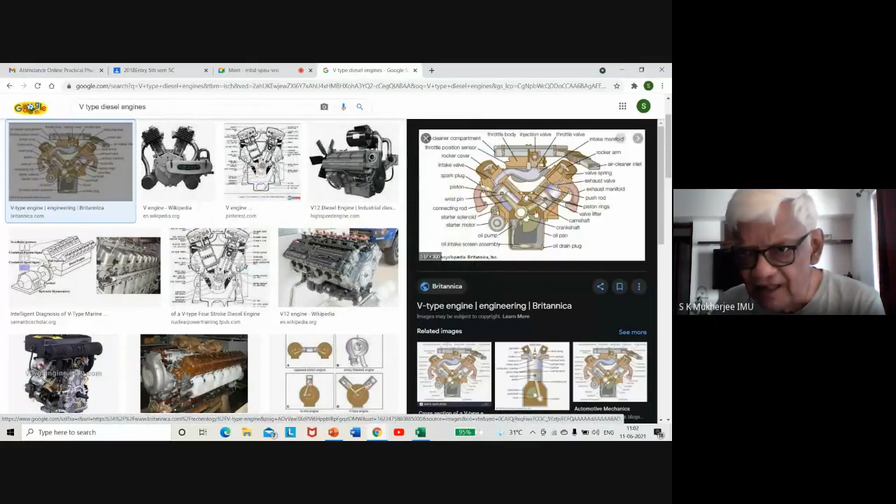Alternatively, you can have a look at this one. This is also a diagram of a V-type engine, where two pistons are connected to one crank throw. Let me just put it up on top. This is your V-type engine. What you see, both are connected to one crank throw.

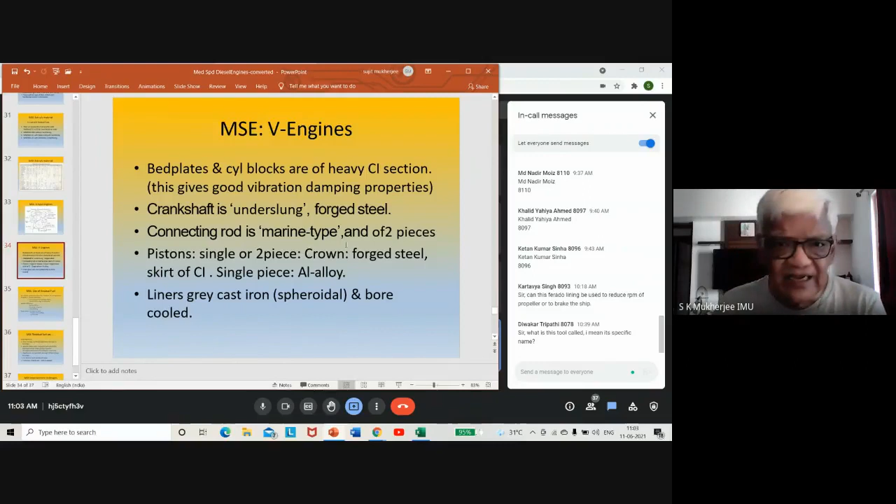Let's move on. Next, bed plates and cylinder blocks are of heavy cast iron, which gives good vibration damping properties. The crankshaft is underslung and made of forged steel. The connecting rod is of the marine type and of two pieces, meaning one will be the keep and one the main connecting rod part. Pistons are single piece or two piece.

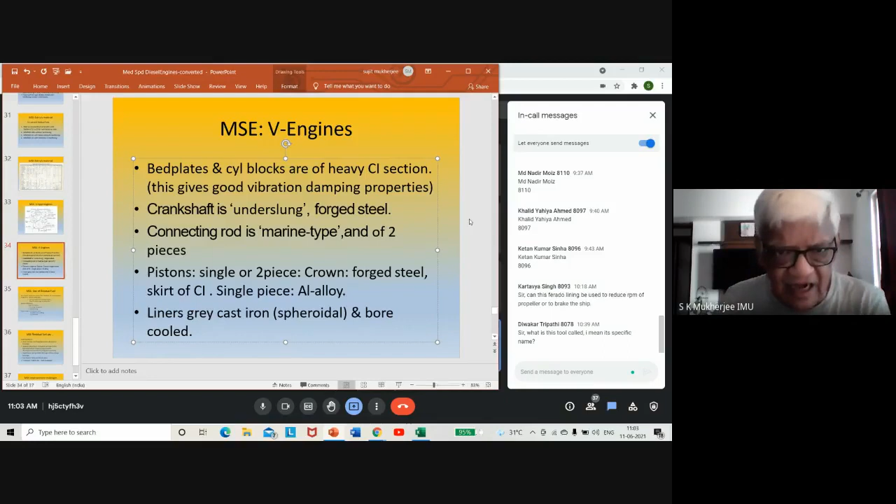For engines asking for much more power, which have higher exhaust gas or combustion temperatures, you cannot afford to have an aluminum alloy piston. So instead, you have a two-piece piston where the upper part is made of forged steel and the bottom part of thin cast iron. The compromise is handling higher temperatures for a little more added weight. That's the basic requirement. Liners are made of grey cast iron, which is spheroidal cast iron, and are bore cooled.

Use of residual fuel in medium speed engines has given rise to a lot of problems regarding ignition, knocking of engines, after burning, carbon deposits, all these things are there. So use of poor quality residual fuels, the problems and consequences are: number one, ignition difficulties.

Sometimes engines don't start. To start, you have to make sure that the engine and the oil are both in readiness. Second big problem is increased wear of running surfaces, liner and piston rings in particular. Catalytic fines are one of the most common factors causing wear and tear of the engine. Apart from this is combustion debris and ash, which also plays a role in causing wear down of your cylinder, liner and piston ring.

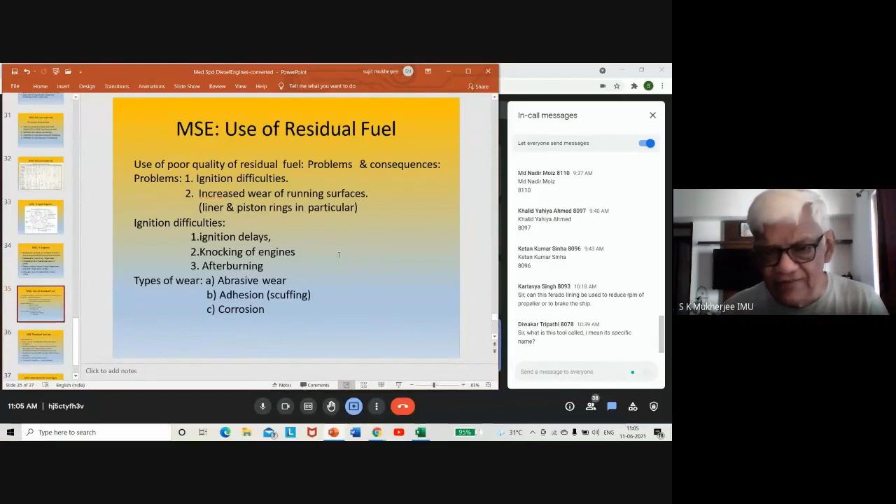Ignition difficulties are mainly ignition delays, knocking of engines, after burning. Knocking of the engine is caused on account of ignition delay. It is a rapid combustion of fuel within a short time because the fuel that comes into the cylinder does not ignite, and by that time more and more fuel comes in. When it does ignite, the entire fuel explodes or detonates, and that amounts to detonation.

After burning of fuel means the combustion process continues even after the combustion stroke is completed. That is what it means. The wear that arises on account of using residual fuel is abrasive wear, adhesion which is scuffing, and corrosion.

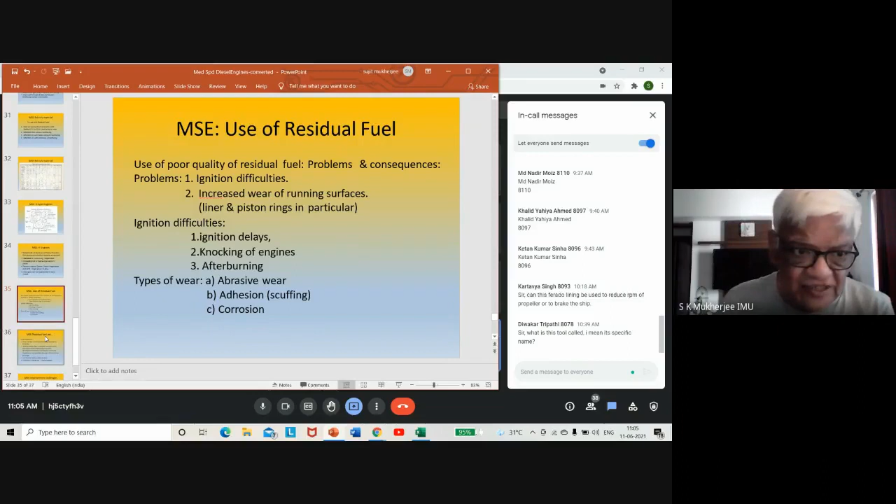These are the main wears. And what are the consequences? Poor starting, misfiring, knocking, damage to bearings. Whenever there is knocking, the force is ultimately transmitted to the bearings at the bottom. It is like a hammer blow on top of the piston.

That is why knocking is a big damaging element. Ignition delay gives low peak pressure, after burning causes carbon deposits, poor power development, wastage of fuel and poor economy. That is the bottom line - after all, money goes - plus rapid wear and possible damage of liners, rings and bearings.

Catalytic fines in fuels accelerate wear - that is true. Catalytic fines are mainly silicon oxide and aluminum oxide, if you remember.

Corrosion can be cold corrosion as well as hot corrosion. Both are increased because the residual fuel also contains some amount of sulfur. But now with low sulfur fuels being utilized, the amount of cold corrosion has diminished. Hot corrosion can still be there because the quantity of vanadium has not been reduced much, and the amount of sodium that comes from seawater is variable. So if the proportion of sodium to vanadium is 1:3, the catalytic effect of formation of salts is multiplied.

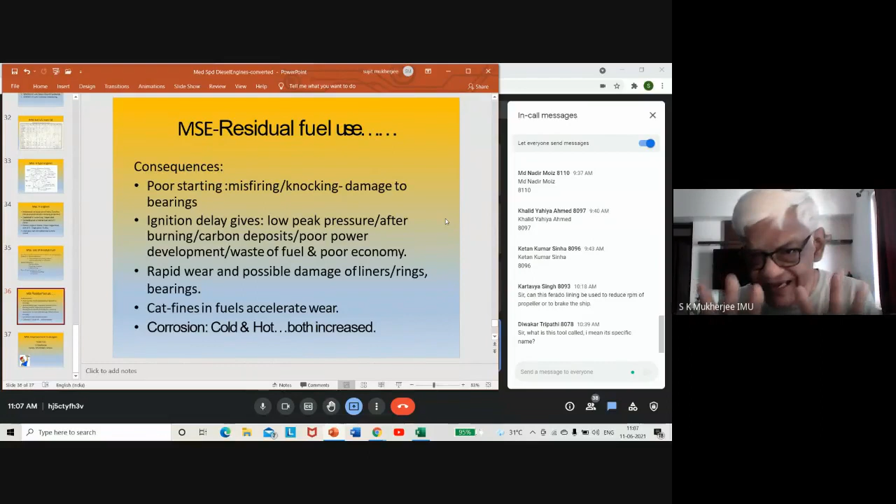These salts number eight in total, called vanadates - sodium divanadate, trivanadate, all the vanadates are there. They are the main cause for hot corrosion.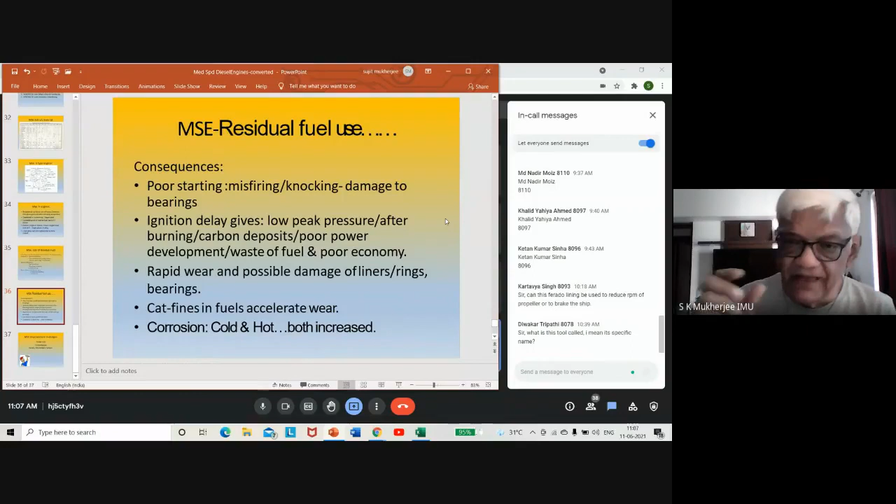I will send this link to you, so continuously read up on the information given in the PowerPoint. If you have any questions, definitely refer to any part you have difficulty understanding, and we shall clarify all the points that are there.